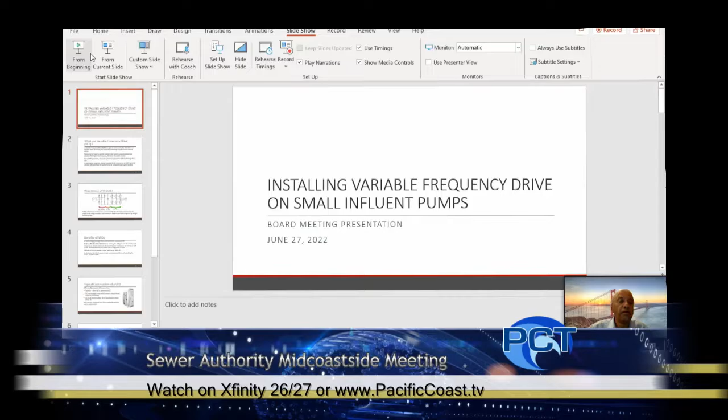Move to item 4, regular business, authorize the general manager to issue a purchase order to Calcom Systems for the supply and installation of variable frequency drives with necessary accessories for the 5 new small influent pumps in the amount of $85,884.04. Okay. Since it's a light agenda, I took the liberty of putting a small PowerPoint to explain the variable frequency drive. So if I may share the screen, please. Are you able to see my screen? Yes. Director Clark, I see your hand raised. Did you want to wait till I finish my presentation or ask a question now? Okay, yeah.

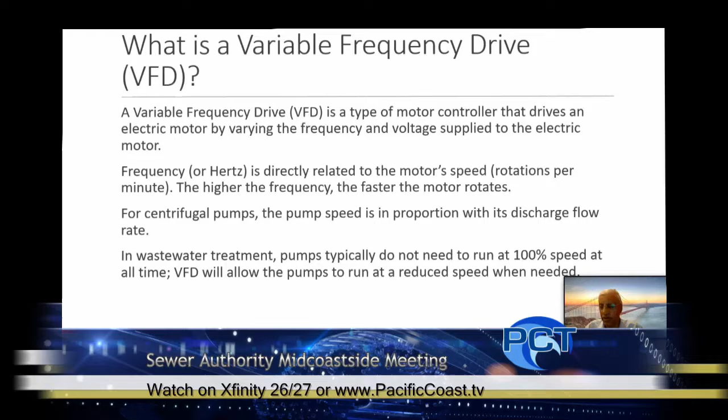Sorry. No problem. So this is about variable frequency drives, which we plan on installing on those existing small influent pumps. Now, what is a variable frequency drive? Too basic a question, I'm sure most of you know about it, but I just thought I'll bring it to the public's attention. A variable frequency drive is a type of motor controller that drives an electric motor. It basically varies the frequency and voltage supplied to the electric motor. A lot of times, it is also called an AC drive, alternating current drive. The frequency or hertz is directly related to the motor's speed. The higher the frequency, the faster the motor rotates.

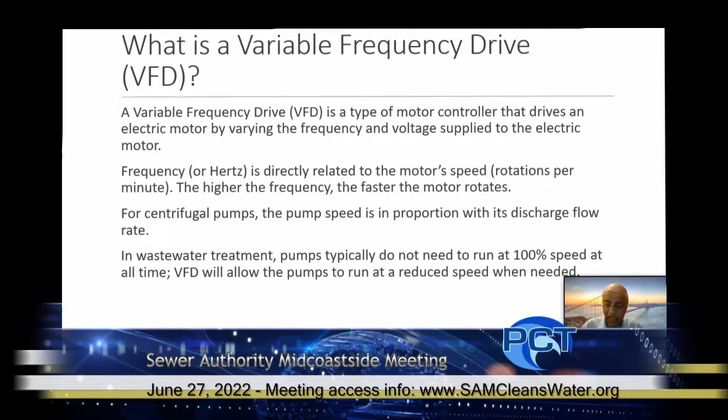So in the case of a pump, the pump speed is proportional to its flow. If you increase the speed, then the flow increases. So it's all related. The frequency increases, the speed of the motor increases, and then the flow increases. In wastewater treatment, pumps need not run at 100% speed all the time. The variable frequency drive allows the pump to run at reduced speed when needed, which means depending upon the demand, it can get the pump to run to higher flows or lower flows. Now, how does the VFD work? The VFD has three basic components: an input rectifier, a DC bus, and an output inverter.

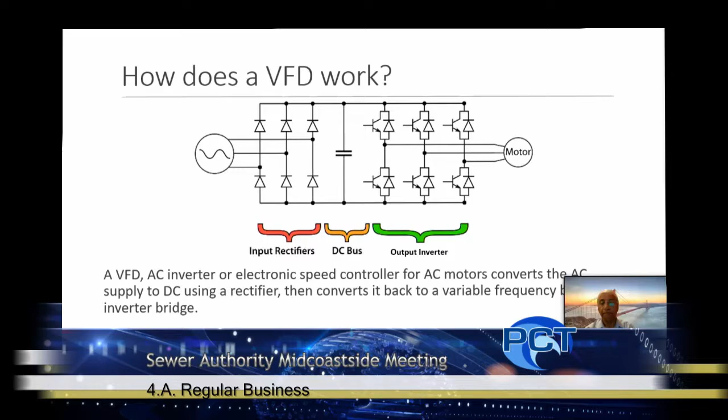So what happens is, as you all know, the current that we have is AC, which is alternating current. So when it gets into the variable frequency drive, the input rectifier converts it into direct current, into DC. And then in the middle, which is called a DC bus, the DC bus makes sure that the DC coming in gets filtered and properly conditioned. It cuts out all the anomalies and filters it, and then brings it to the third stage, which is called an output inverter.

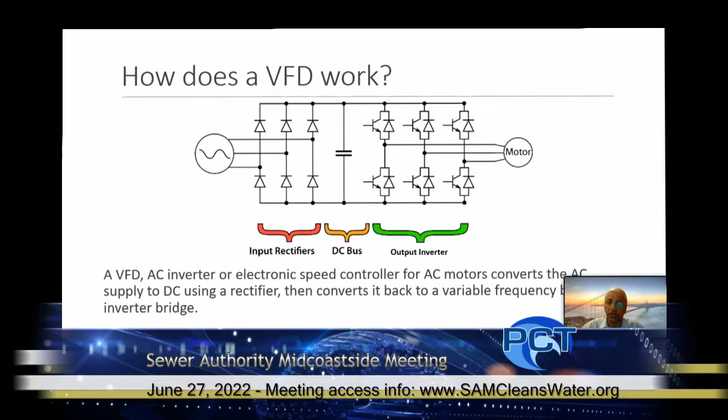And the output inverter again converts the DC back to alternating current, and then it's fed into the motor. So all this filtering happens in the DC bus. And all these three items are a part of the variable frequency drive.

Now, what are the benefits of the variable frequency drive? This saves energy because you don't have to run it always at 100% speed. It prolongs the motor and mechanical component life. It reduces the need for maintenance because it has the ability to vary the velocity and torque of an electric motor. It can alleviate wear and tear on the motor, as well as the machine driven by the motor, over a long period of time.

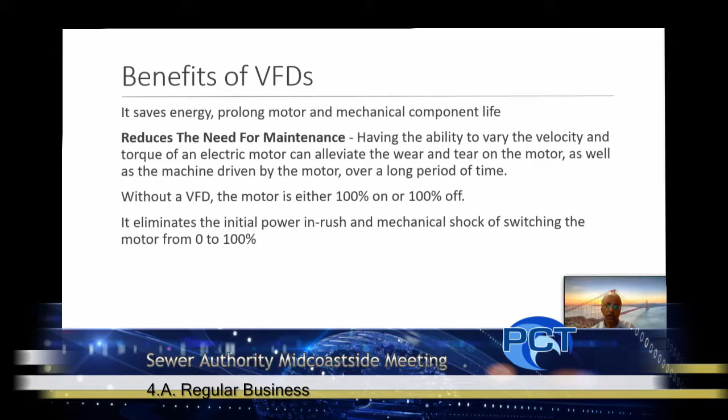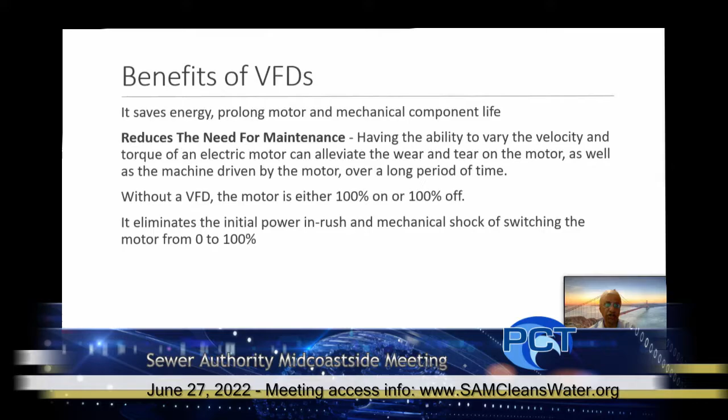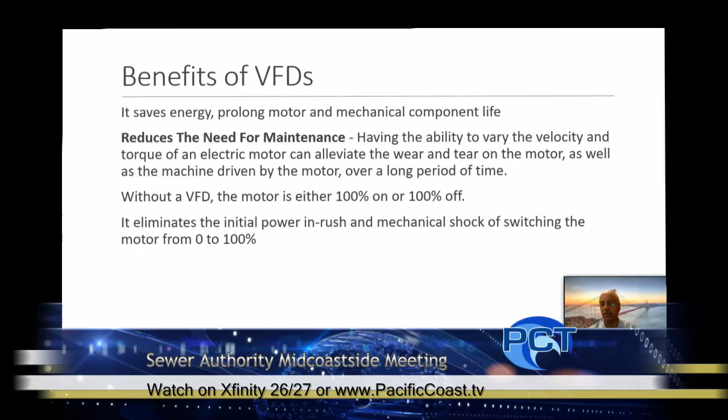Without a VFD, the motor is either 100% on or 100% off. While with a VFD, you can have 100% on, or you can have 80, 75, 60, whatever it is. This eliminates the initial power inrush and mechanical shock of switching the motor from 0 to 100%. Just imagine a sudden demand is required; if there is no VFD, it suddenly changes from 0 to 100. So that can cause damage to the motor and its components.

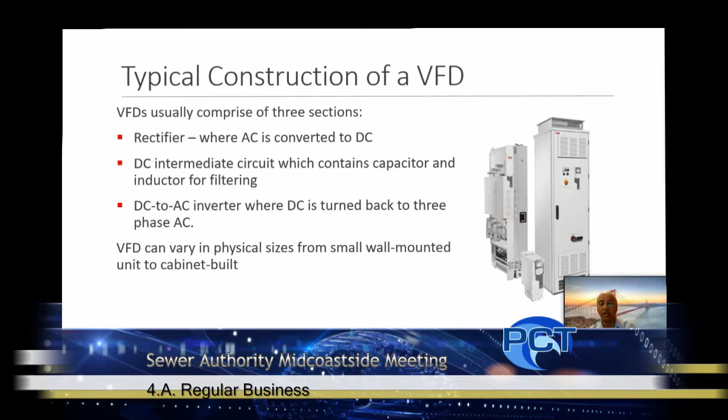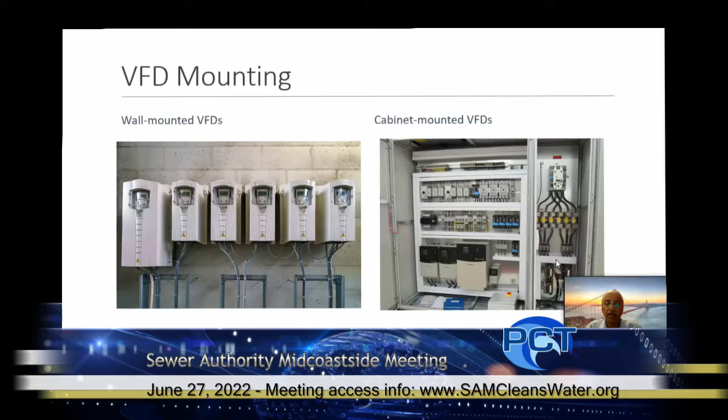And just to let you know, we have about 35 VFDs all over the wastewater treatment plant at various locations: influent, effluent, digester building, various places. Of them, almost 32 are one make, which is ABB. And the balance are probably Allen Bradley, which were probably procured way back in the past.

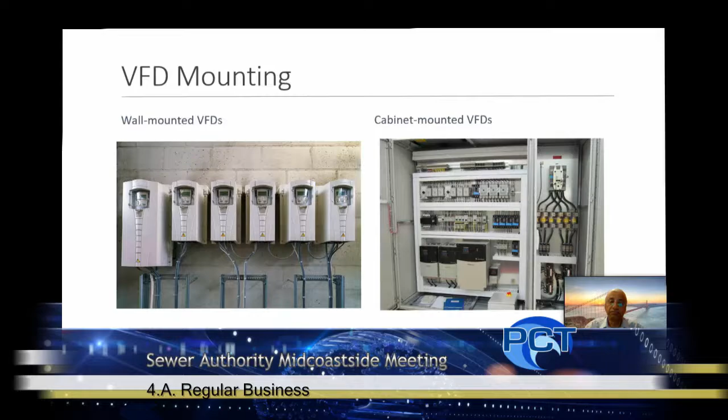Of the 3 VFDs for the small influent pumps, we have 1 which has stopped working. Number 3 has stopped working. Number 2 is getting close to, I think, dying. And number 1 seems to be working fine. Numbers 4 and 5 are not on VFDs at all. So it is necessary that each of these small influent pumps be equipped with a new VFD. That is the proposal that has been brought to the board today.

Now, the new proposal being presented to you will have a bypass system to allow the motors to run across the line at 100% speed. In case the VFDs need maintenance, the bypass system allows the motors to run across the line. The existing cabinets will be demolished because the VFDs in the existing cabinets are all old models, so they are pretty huge. The new VFDs we procure are smaller in size and therefore will not fit into the existing cabinets.

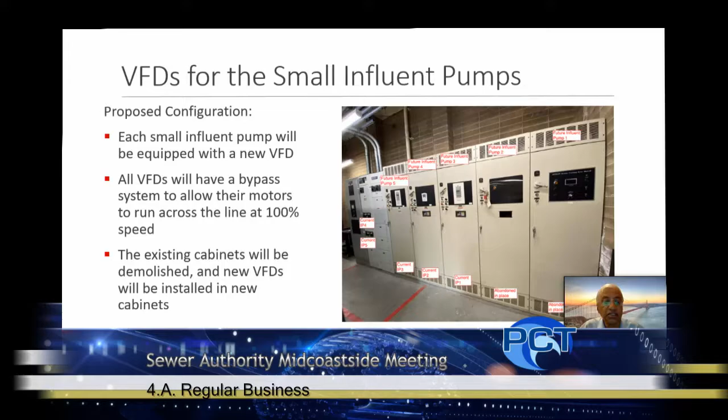So that's it. That's all I wanted to share with you. I can get back to the screen, and if anybody has questions, I can bring it back again.

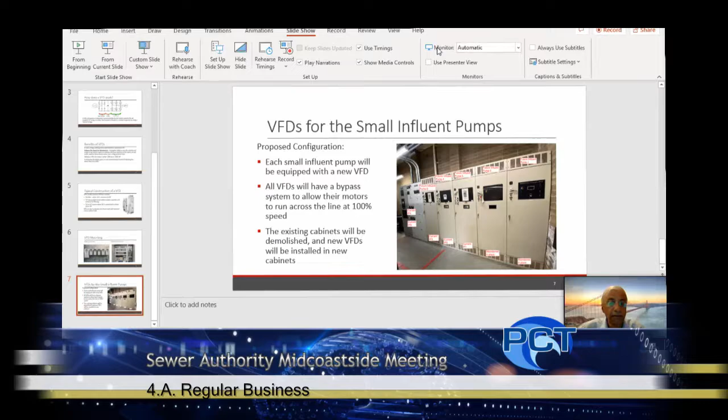Sorry. Any questions for Kishen? Matthew? First, I'd like to make a comment, which is that these PowerPoints, which are clearly prepared ahead of time, I think should be subject to the Brown Act, and they should be noted in the agenda, and they should be available to the public and to the board before the meeting.

Perhaps our counsel can give us an opinion on that. If he needs to research it, I'll be happy. I can speak to it. No research needed. But yeah, happy to speak to that, Director Clark. The rule in the Brown Act for materials, so your agenda obviously has to be posted within a certain amount of time, whether it's a special meeting or regular meeting. For materials that are going to be discussed during the meeting, it has to be made available to the public at the same time it's made available to a majority of the board.

And so to the extent that it's made available to the board right now at the same time as the public, it's not a Brown Act issue, but there could be a question as to whether the board wants the PowerPoint sooner. That's not really a legal issue so much as just a management board direction kind of an issue. Well, may I express my opinion? I would always like to have the PowerPoints ahead of time. I would agree with that. Director Dye.

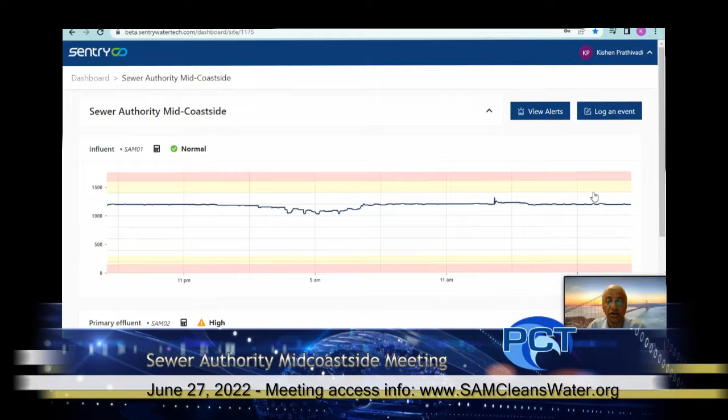Can I share my screen, please? Yes. Thank you. Yeah, so we had mentioned a couple of meetings earlier that we have installed these 2 probes at the influent and the primary effluent. And these have now been calibrated. The sensor shows real-time values, and we've also put it up on the SCADA. And these pretty much match the lab values that we actually measure. So staff is able to make best use of it. They're able to check and make any process changes if required.

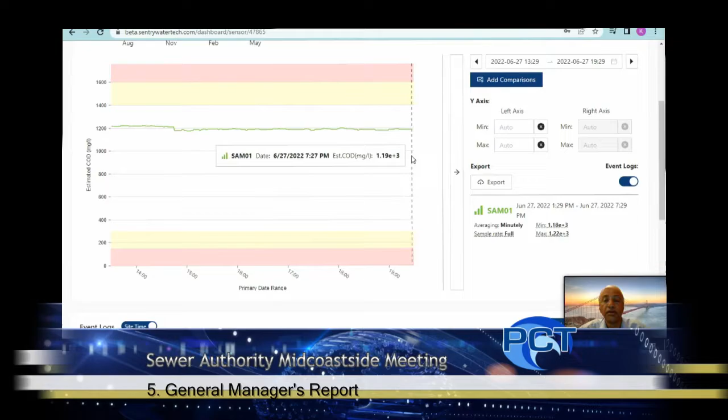Like, for example, if you take this, I don't know if you're able to see it. This is exactly at this time. At 7 o'clock, the y-axis is actually COD, and the x-axis is the time. So the y-axis shows you 1190. And as you take it further, sorry, I think it's, yeah, see this part of it. So this shows you on a real-time basis what the COD values are. And this is very useful for the staff.

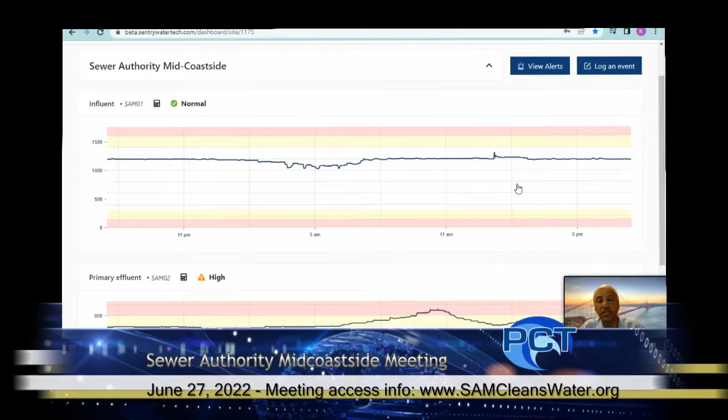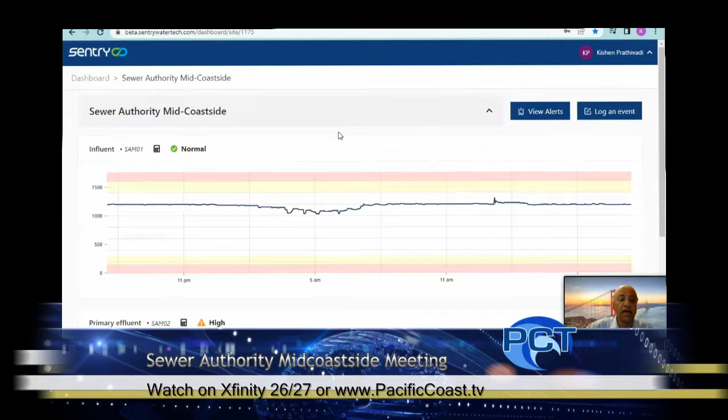It also triggers alarms. We have given certain set points, and when the COD reaches a particular set point, it sends you an email. This is very useful for the staff, and we're excited about the use of this. It gives you both the primary effluent as well as the influent. Last time when I shared this screen with the board a couple of months back, we hadn't calibrated it. The y-axis was still showing the carbon consumption rate, and the primary effluent values were higher than the influent, which is not the case.

Right now it's been calibrated, and these are the correct values, showing that the influent values are higher than the primary effluent values. I just wanted to share this, and this is available real time for the staff to improve their processes. Thank you. Any questions for staff on that process? I see Director Dye has a question. Barbara?

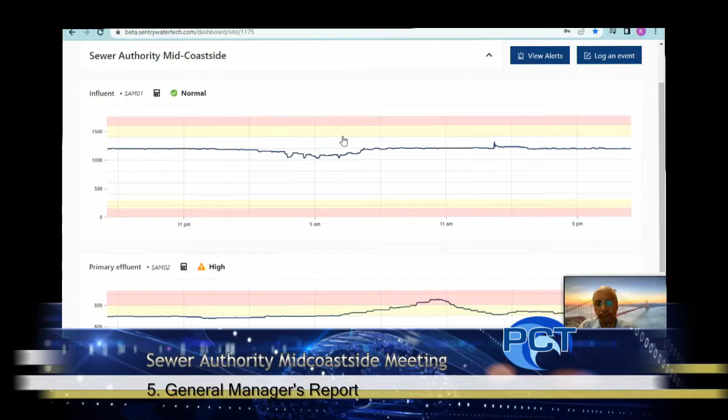So what are the yellow and pink bands? Yeah, the yellow one is actually an alarm notification thing. It gives you signals, and we can set that at any point we want. If we think the COD levels are high when it reaches 1200, then we can set the yellow line there. So then it sends an alarm to us. It sends an email to us, and then the red one is when it becomes critical, very critical.

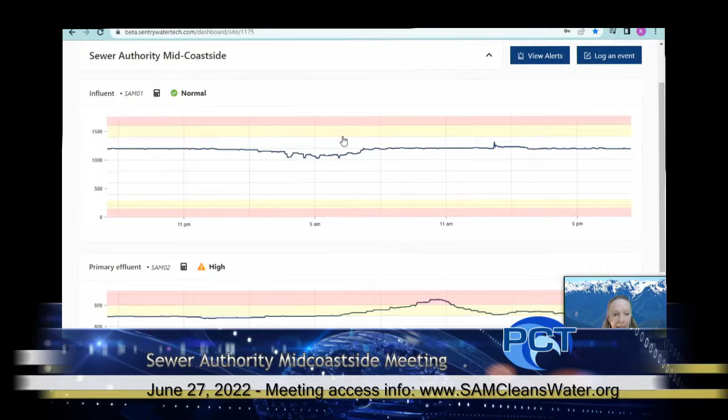All right, well, it looks as if the influent was relatively low, and immediately after that happened, the effluent went high. So yeah, this is the primary effluent. What is important for us for the process is the primary effluent. Before it gets into the mixed liquor, into the aeration basin, we make sure that these values are within limits. But you just said that's in the problem area, and yet there's nothing in the influent that would correlate to these higher readings.

Correct. Yeah, because both have got different levels of acceptance. I mean, the maximum could be different for both of them. But still, you would think that there would be a correlation. Is there a big time lag between influent levels and effluent levels that we're not seeing?

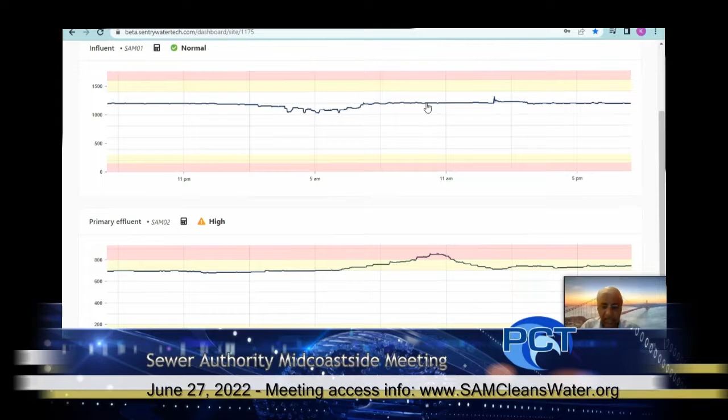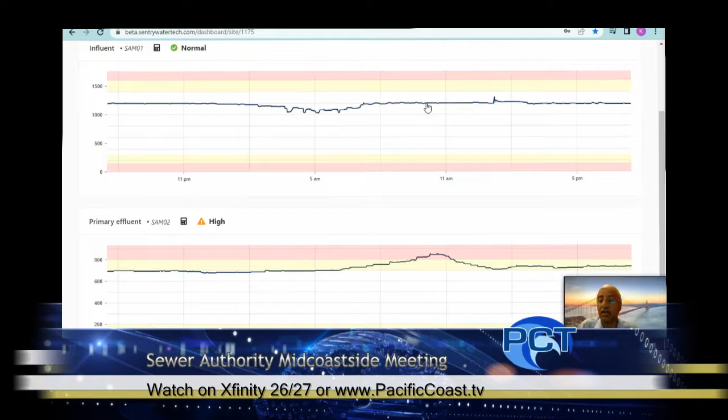Yes, there is a time lag because the sensor senses the influent, and by the time the sewage actually comes to the primary effluent, it goes through various stages, goes through the grit chamber, and then comes to the primary effluent, it's going to take a little bit of time. There is a little bit of a time lag.

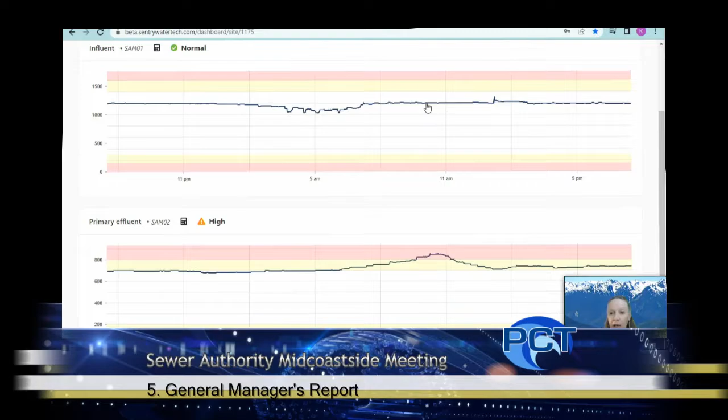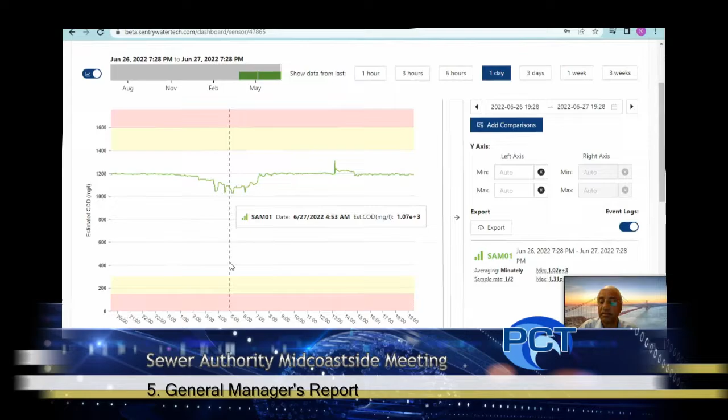So then showing these two together, these two are completely unrelated in terms of time. Yeah, that is why this was just to show it on the screen. Otherwise, we check only influent or primary effluent, whatever is important for us. Okay. Thank you. Thank you.

Any other questions? Seeing none, we can move on to the attorney's report. Yes, thank you, Madam Chair.

The only thing I was going to share briefly, and this is probably a little more relevant in the water context than the wastewater context, but EPA is really upping the ante in their efforts to regulate PFAS, and some of you have probably heard about that in other areas. It's a big deal in water, but it's becoming a bigger issue in wastewater as well. Last week, the EPA released advisories recommending that water providers not provide, or at least limit, water containing PFOA and PFOS. Those are the big bad perfluorinateds that people worry about.

But in parts per quadrillion, which is, I don't even know how you measure that. So it's extremely low. It made California's standards, which were the toughest in the country, seem quite permissive. It's basically non-detect. So those are, I believe, the long chain perfluorinateds, but they're also regulating a couple of next generation perfluorinateds as well.